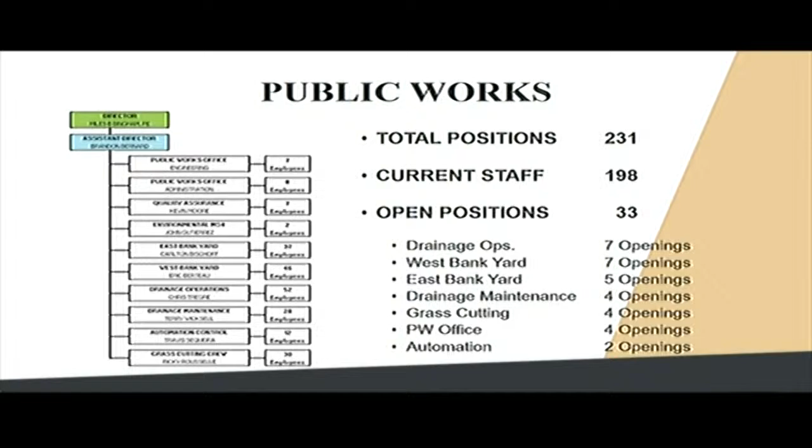Okay, go on. There we go. Did I go one too far? Hold on. Go back one.

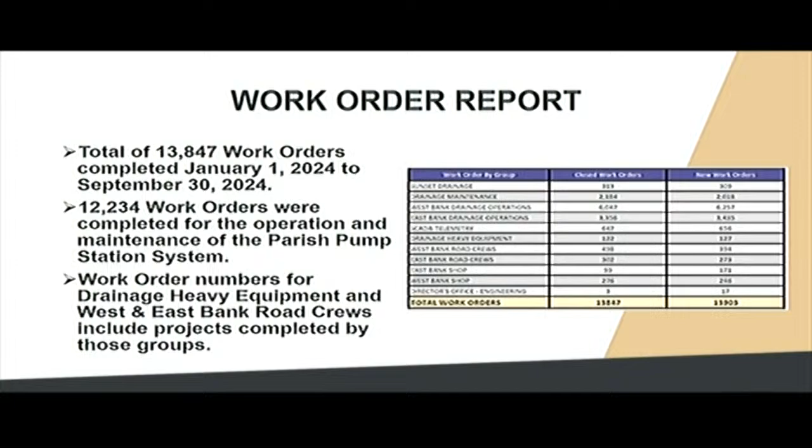So here's our work order reports. This is what we've done in the first 3 quarters of the year. 13,847 work orders completed. 12,234 of those have been on our pump stations, because everything that we do in our pump station generates a work order. The work order numbers for the drainage heavy equipment and west and east bank road crews also include completed jobs, so they don't get as many things done because their work takes a little bit more time.

One thing I did this year that I thought would be interesting is to show where those pump stations are. I've color-coded it so you can see what's in each district, giving us a clear understanding of where our effort is. We do have a lot of pump stations on the West Bank, some smaller ones that pump to a bigger pump station.

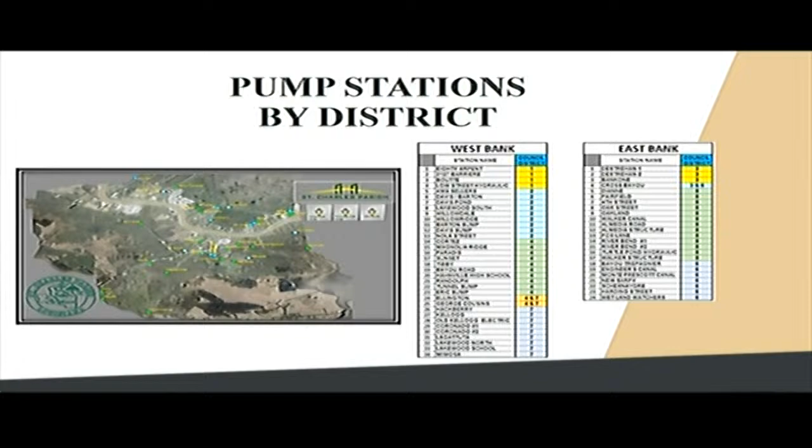Another improvement we're working on right now, this is showing our telemetry for our Destrehan number 1 pump station. We are creating a toggle switch where we can flip a switch and it will take us to a lower level for our pump stations. This would be done in emergency situations when we know a storm is coming, and we can lower our level in our sumps and canals. We don't want to keep it that way because if we keep it too low, the canals start to cave in and we have problems with our pump stations. But if we take it to a lower level knowing a storm is coming, we can be ready for that storm and accept a lot more water that way.

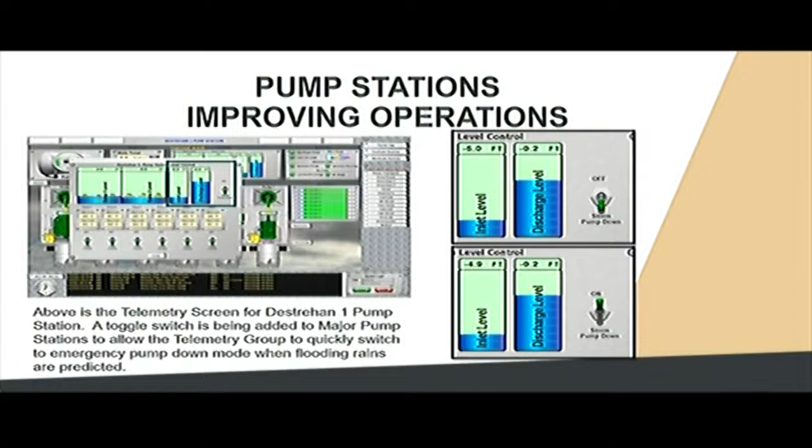Hurricane Francine Public Works response. Some of our hurricane preparations that we've been doing - we used to spend a lot of time down in Des Allemands putting up HESCO baskets. What we saw was a great savings in time by not having to do that during this last storm. The Des Allemands bulkhead has paid dividends already. We literally only had to set up some protection at the boat launch and do some flood fighting where we haven't put down the bulkhead. So our crews were able to do other things, like more work looking at watersheds and preparing for the storm.

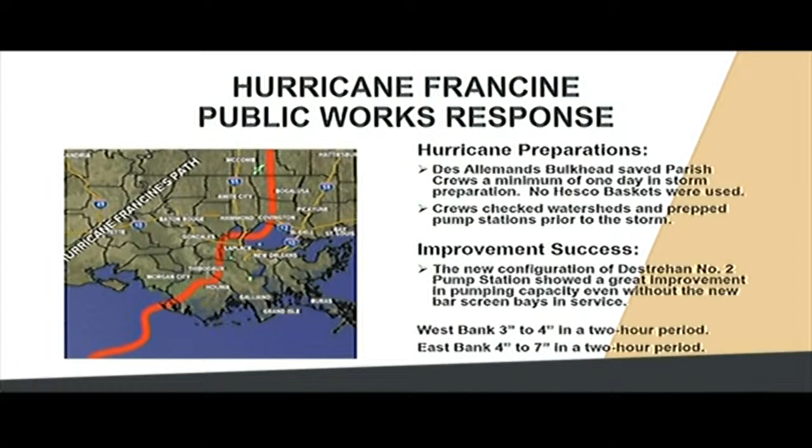Another success was Destrehan number 2, and I know Councilman Pillier talked about this. Now that station is fully operational and can accept a lot more water - it has a much bigger sump. I think we were able to see that in the way it worked before. So I think those two things are already showing our benefit for what we've gotten.

Our Public Works MS4 department doesn't get a lot of attention, and I wanted to bring them up because people may not fully understand what they do. One of the things they do is keep us in LDEQ compliance. We had our permit renewal this year, which we get every 5 years, and for the second time we got no violations found by LDEQ during their review. This is very rare - it's not something you see very often. They usually find some nitpicky thing they want to say you've done wrong.

We also got a grade of 5, which is the highest, very reliable. About the only thing they've said we really need to look at is getting an MS4 inspector for new subdivisions and other things like that.

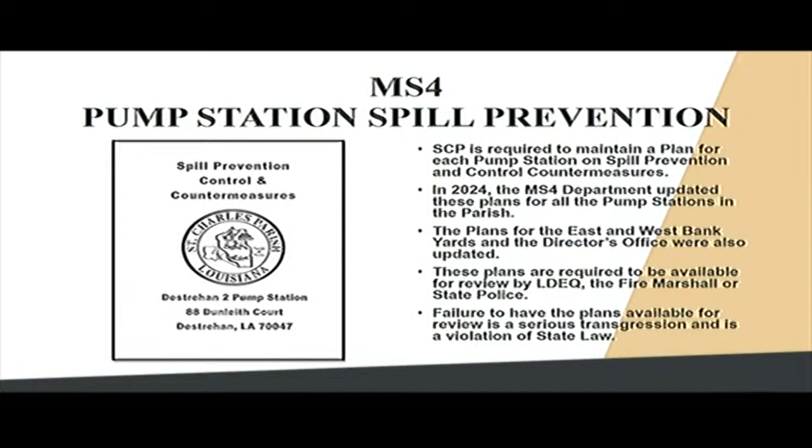We also upgraded all of our pump station spill plans. This is something we were in need of doing. It keeps us in compliance with LDEQ, the fire marshals, and the state police who review those things. The plans are for the East and West Bank yards, and the director's office were also updated. The MS4 department updated these plans for all the pump stations in the parish, so that's an important thing.

All right, pavement maintenance program. I know I got asked this question during one of our committee meetings. We updated it this year, and what I've got on the right is how many streets were in each category, from very poor to excellent, where each one was, and what the nature of each one is, meaning concrete, asphalt, or limestone.

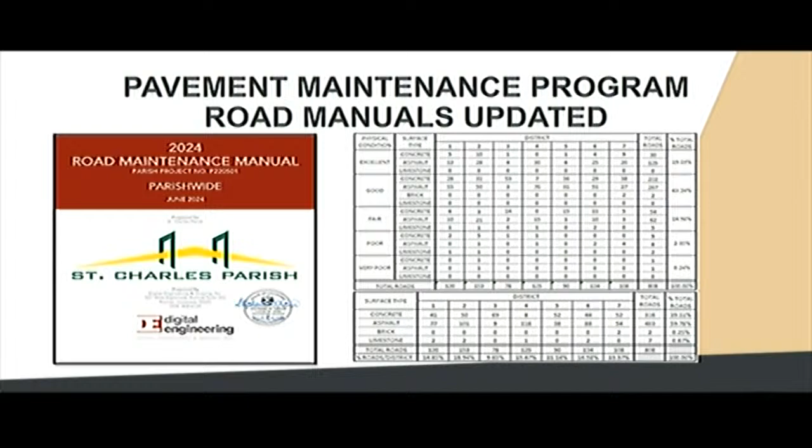The state transportation fund provides $500,000 per year for milling and paving roads. The parish needs to select the roads using an approved rating system, and I'm going to show you that rating system in just a second.

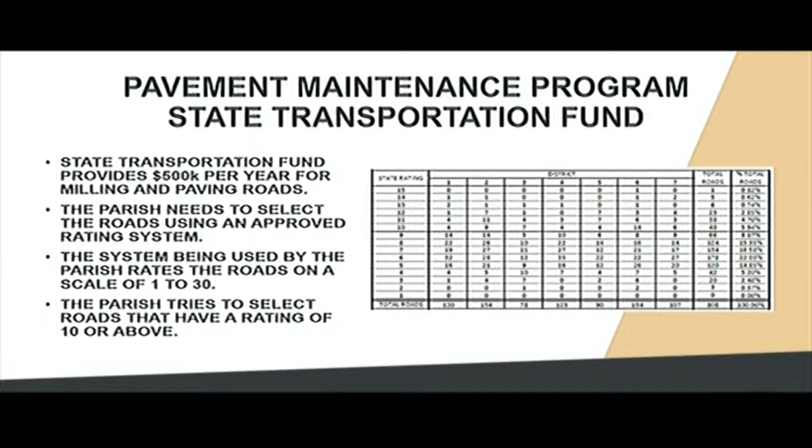The system being used by the parish rates the roads on a scale of 1 to 30. The parish tries to select roads that have a rating of 10 or above, and you can see that we only have a certain group above that.

So here's the rating system. Whereas we usually use the surface condition and maybe some other things, they have a lot of other factors involved, such as whether emergency vehicles use it, whether there are schools on that road, and the number of houses on the road. So there are a lot of things that go into it.

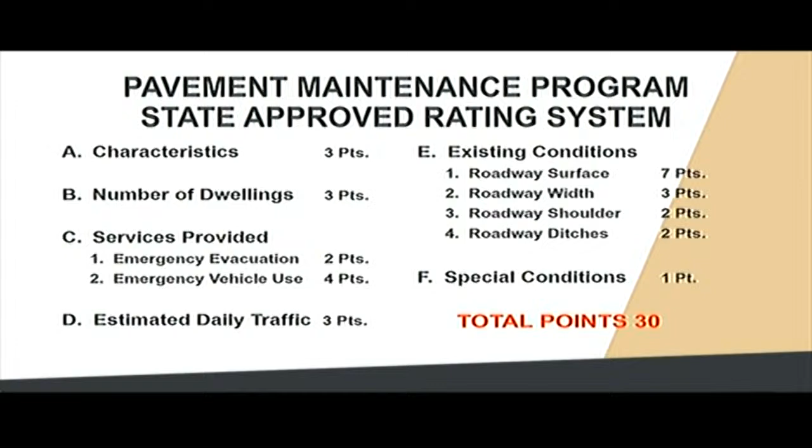What I've found is that you can get the same rating on roads that have very different features on their surface. All the streets I put in this thing have a rating of 13 by that rating system, but if you look at the condition of the actual roadway, there's one that's poor, one that's fair, and one that's good. It doesn't make sense to be doing a good road, even though it's got a rating of 13, if we have others that are equal with a lower condition level.

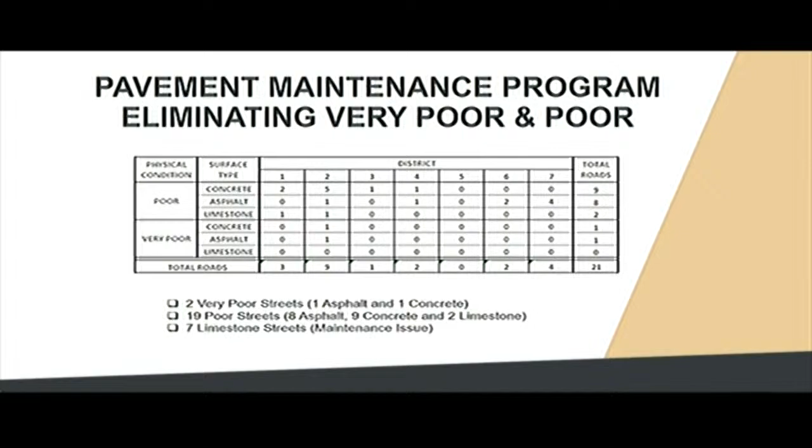So this year, one of my goals was to actually start eliminating our very poor and poor streets. We have 2 very poor streets, 1 asphalt and 1 concrete, and 19 poor streets: 8 asphalt, 9 concrete, and 2 limestone. We also have 7 limestone streets that we're considering how to improve so that we don't have to deal with them anymore.

These are the streets. A lot of them are going to be taken care of in our asphalt or concrete maintenance programs this year.

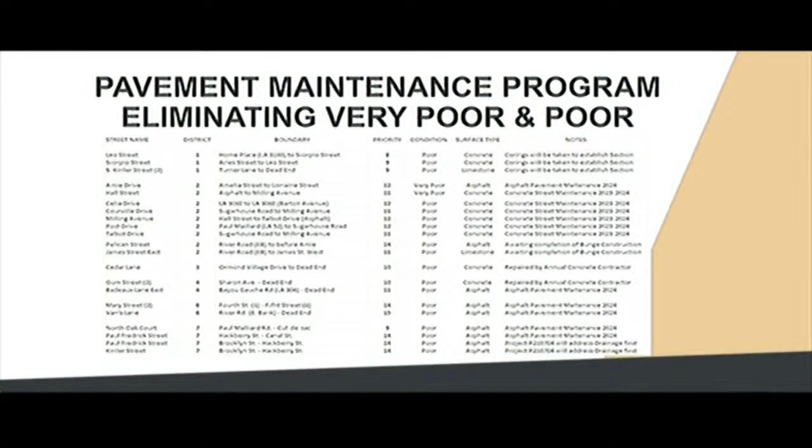The annual concrete maintenance contractor has already repaired 2 of the concrete streets on the poor list. We've got the big project going on over off of Paul Maillard, where we're going to repair 1 very poor street and 5 poor concrete streets, and if we have funds available, we'll be doing 2 additional concrete streets on the poor list.

We also have the asphalt maintenance program, which will be coming out very soon. That has 1 very poor and 5 poor asphalt streets that we will fix. 2 poor asphalt streets, Kinler and Paul Fredrick, from Brooklyn to Hackberry, will have a project dedicated to their repair, and we will be doing those after we finish the drainage repairs.

We've also been looking at our limestone streets, and we've cored those to find out how much actual limestone we have there, so we can see if we can mill down a little bit of that and put asphalt paving on top of it.

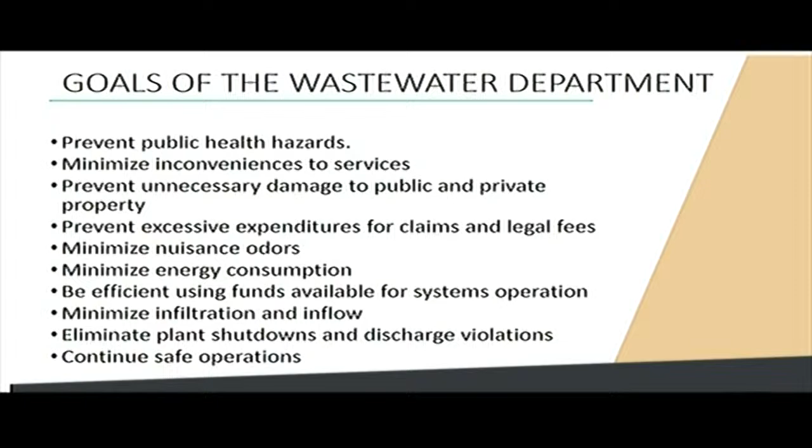So like we said, we have 208 lift stations, 82 can stations. Those are individual stations basically down on the island and all that we maintain. 4,300 plus manholes, and then the 211 miles of gravity lines and 119 miles of force mains.

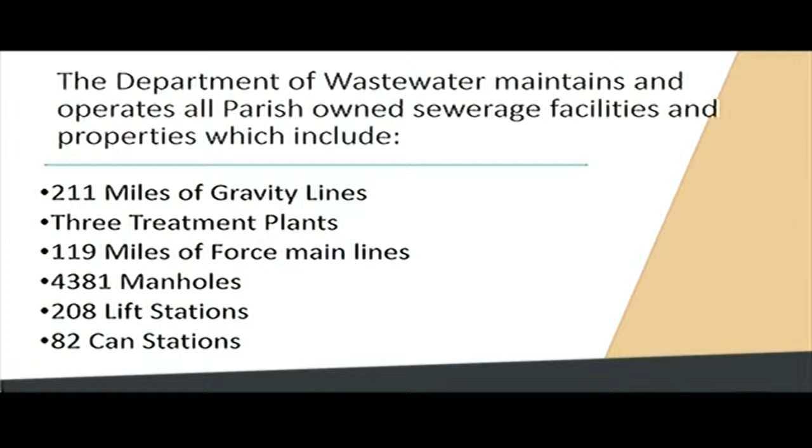That's another problem with the lines. A lot of the stuff done, if you look at it, early 40s to 60s was clay terracotta pipe. There's still some of that here in the parish. They went to AC pipe, which is asbestos cement pipe. That, over time, probably the 70s, 80s, gets brittle. It starts to break. We've had one line on Texaco Road that's broken 7 times in the last 2 years.

The cost to repair that is about $20,000 to $25,000 a pop every time that breaks. So that's a costly thing for us. So we're looking to manage and replace some of these old AC lines right now, try to line some of the old terracotta lines. And the new technology is polyethylene and PVC pipes.

A lot of the newer subdivisions and all that coming online have those newer pipe systems in there. We have gone and changed where we have allowed zero infiltration in new subdivisions, so we won't get that I&I that we've been getting in the past from the old terracotta lines and all that. Those joints separate over time and allow groundwater and rainwater to get in. So those are some of the things we're doing. We're doing a pipelining program that is trying to eliminate a lot of that infiltration. Little by little, it's very costly, but little by little, we're trying to attack it.

We have three plants. We have the Destrehan plant. This one is designed to treat 6 million gallons a day. You can see that's about 1.124 billion gallons we treat in 2024, which is right around 3 million gallons a day that the current plant is treating right now. So it does allow for future expansion on the East Bank. We do have room, and there our biggest problem is getting it to the plant.

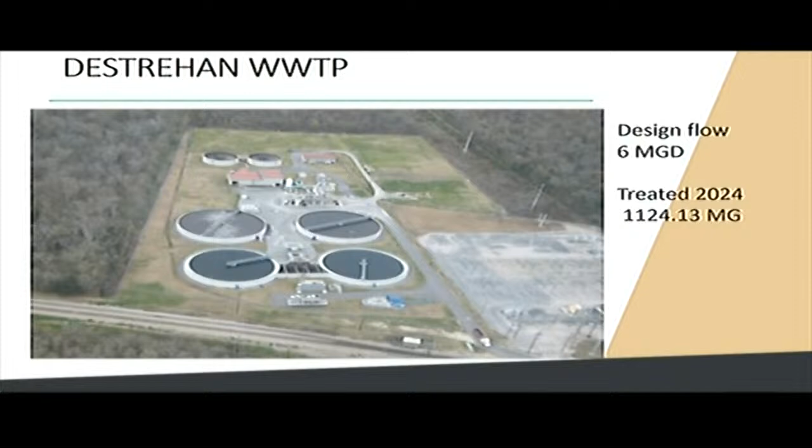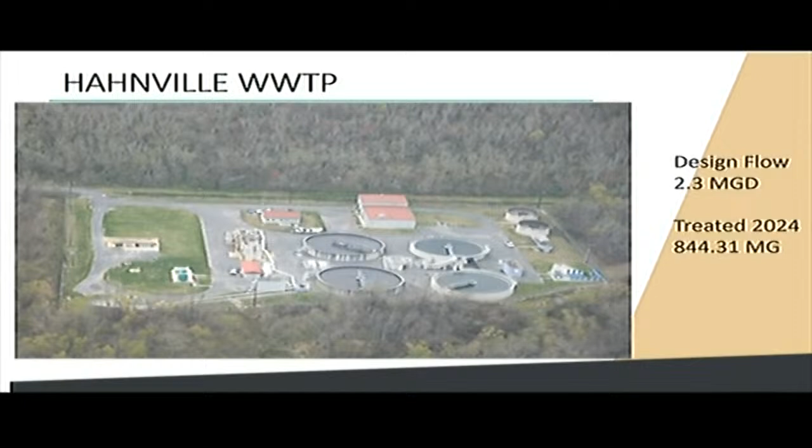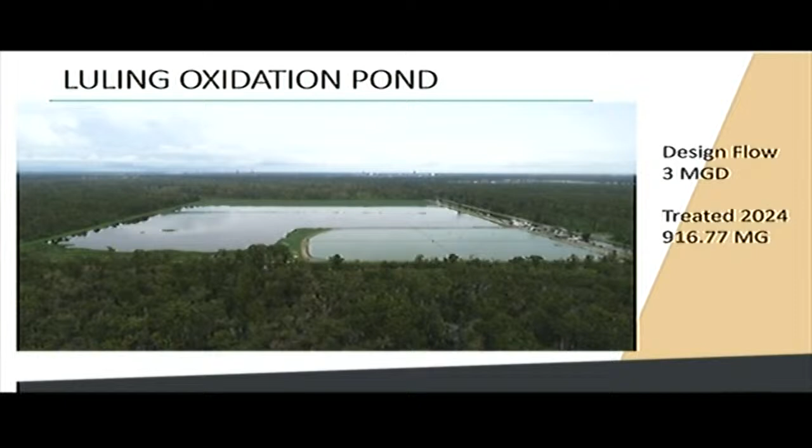It's been determined from studies that the rich nutrient water we discharge into the marsh helps the tupelo gum and cypress trees - their growth rate increases threefold compared to a control area that doesn't get the high nutrient water. So that helps them grow.

With sea level rise, you're going to start seeing a lot of these swamps go underwater completely. A lot of them already are, but it's going to get worse and worse. So anything we can do to put rich nutrient water in to keep the vegetation growing helps.

One of the things we'll probably be doing in the future is some planting - we'll likely start planting cypress trees in some of the marshes we're discharging to. We're actually looking to discharge into a different section now, and we're in negotiations to do that in the future as well, where we might be able to get some drying times.

We did see some drying when we had the drought about a year and a half ago. Some areas started to dry up because there wasn't enough water going through with drainage. That gives you the cycle where if cypress trees are dropping seedlings, you might see those seedlings start to grow. But you have to fight nutria and everything else out there that's tearing that up.

We do have to train all of our operators. We have around 40 operators that hold licenses, by class. That's a requirement of the Department of Health that we're required to have licensed operators. Our plants require them to have a Class 4 license to operate, and all of our operators do have Class 4s.

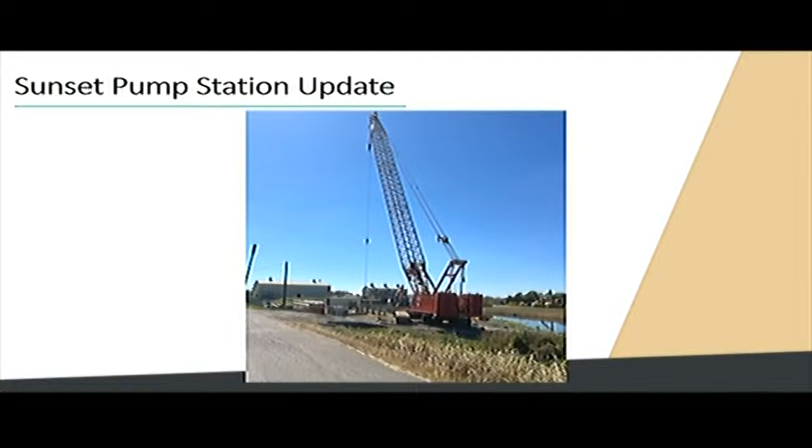All right, Sunset Pump Station update. The crane is on site at Sunset Pump Station, and work will begin in November. If the crane looks familiar, it was just moved from the Destrehan pump station site. So Sea Level Construction, I think, has been working continuously in the parish for over a decade, because while they are working on a project in the parish, they win another project. We appreciate them sticking around and helping us complete some of these updates to parish infrastructure.

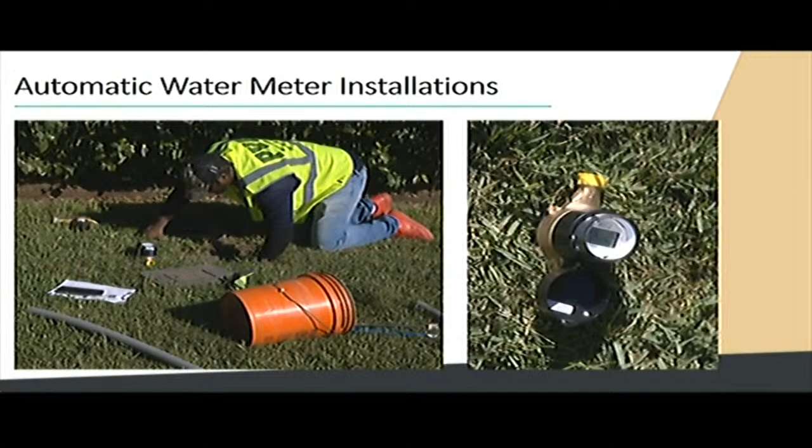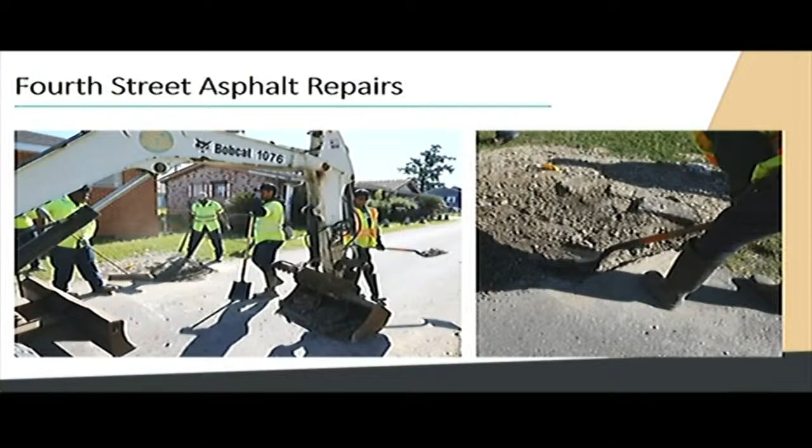The 4th Street asphalt repairs. Last week our Public Works crews shut down 4th Street in St. Rose between River Road and Short Street to perform routine asphalt maintenance. Parts of the street crumbled on the edges and needed patching, so that work was completed.

Number one, First Street, First Cross Ditch in Ormond is underway. We're upgrading that ditch with two 48-inch culverts from Ormond Boulevard to Ormond Oaks Canal. Additionally, you can see the work has started on cleaning out the Ormond Oaks Canal. Again, this is always a tough project when we have to get in here because there is no access to it, so we have to get a small machine in the canal and work head on.

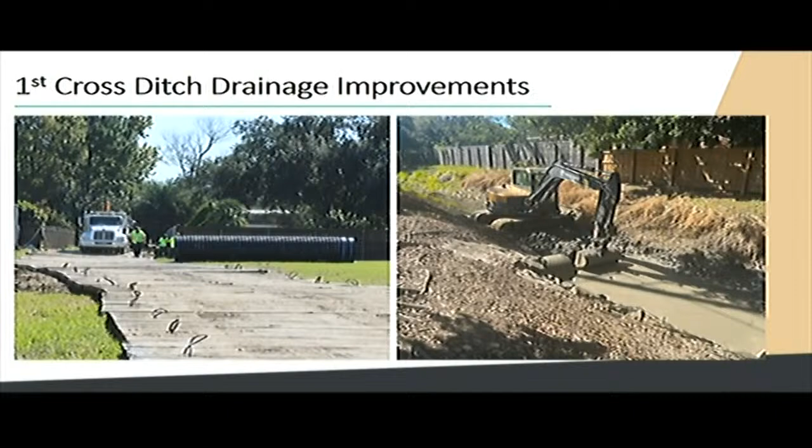St. Maria culvert replacements, that project is starting to wrap up. It's been going on over the last couple of months to replace collapsed culverts and improve drainage from Wanda to Cousins Canal. Last week crews continued installing new corrugated pipe and poured 19 new concrete catch basins.

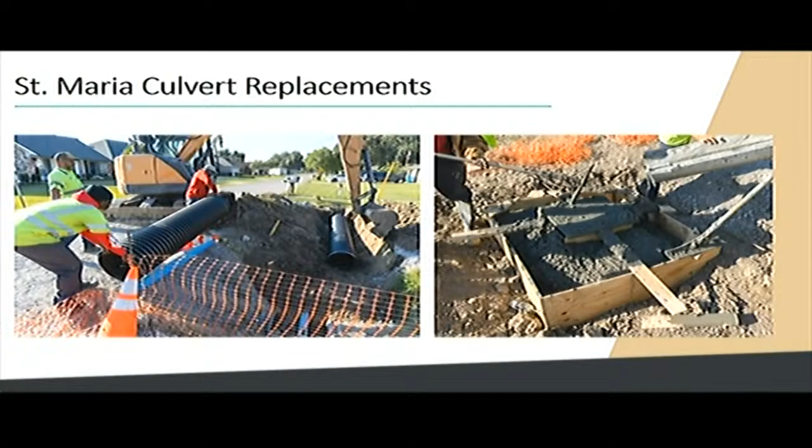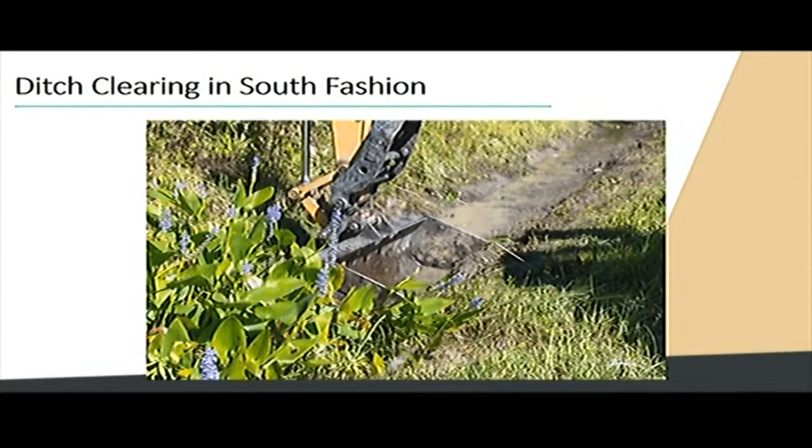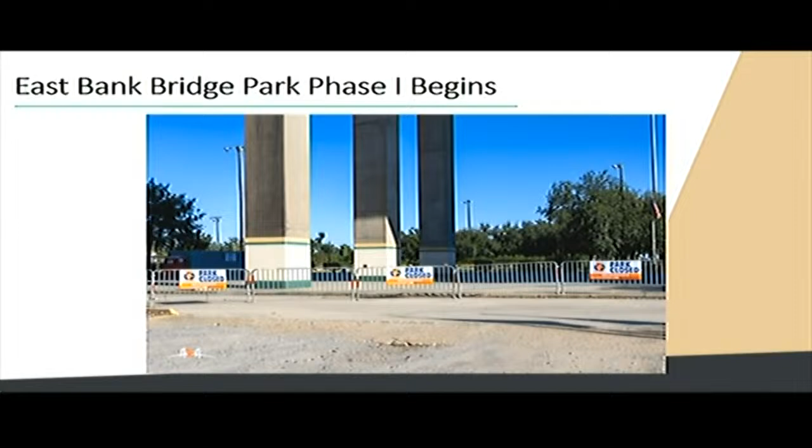East Bank Bridge Park Phase 1 construction kicked off last week, so we've had to close some of the park to accommodate materials and equipment. We're mirroring what was done at West Bank Phase 1. East Bank Bridge Park will also get turf infield, scoreboard, LED lighting, tennis courts, new fencing, and 2 pickleball courts. In addition to the playing area improvements, we will concrete and stripe the parking lot along River Road, which should give us a few more spots. If you're familiar with that area, during big events people park outside the park along the levee and in the median, so adding physical spots there will give us extra space, and we're doing it in a way that allows for expansion of future parking at the site.

Bethune Park is well underway as well. Fresh concrete has been poured for the walking paths, pavilions, and basketball courts. We hope to have this phase of improvements done by spring, and phase 2 will include a covering on the basketball court, as well as a new playground set that has been picked out and will be in the Norco Booster Club colors.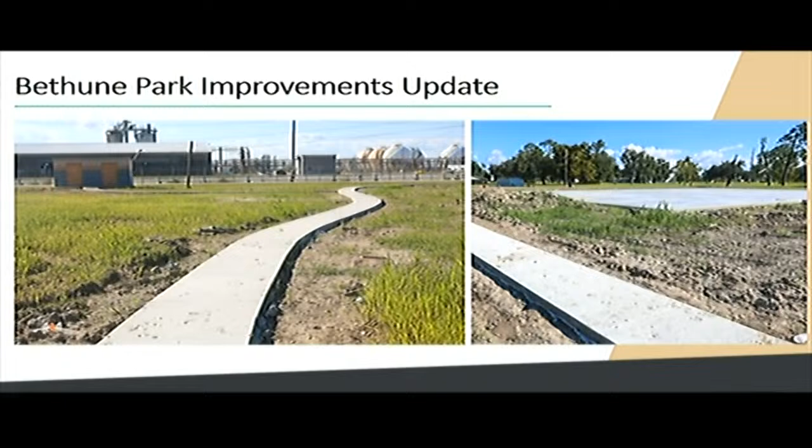Junior Pelican League combine basketball season is just around the corner, and Parks and Rec have partnered with the Pelicans to host a combine that allowed our young athletes to do the same drills the pros do before entering the WNBA or NBA. We had a maximum of 125 participants registered and join us, and we hope to do this event again next year — great event.

Basketball coaching clinic: we aren't just getting our kids ready to hit the court, we're also getting our coaches ready to lead those players for a successful season. The head basketball coach at Hahnville and Destrehan will help our coaches learn and lead drills, as well as practice, to make our players better. Sessions will be held on October 28th and October 30th, and coaches can sign up and attend one or both at scpparksandrec.com. Huge shout out to our team at Parks and Rec — this was added based on feedback from residents and volunteer coaches who wanted to coach but may not have known everything needed to have a successful team, as well as the confidence to lead these kids. These coaches clinics really help them gain that confidence and help them lead their teams. We could not perform our recreation program without our volunteer coaches, so we're extremely grateful for them, and I'm grateful for our recreation department for adding this to the lineup for our coaches.